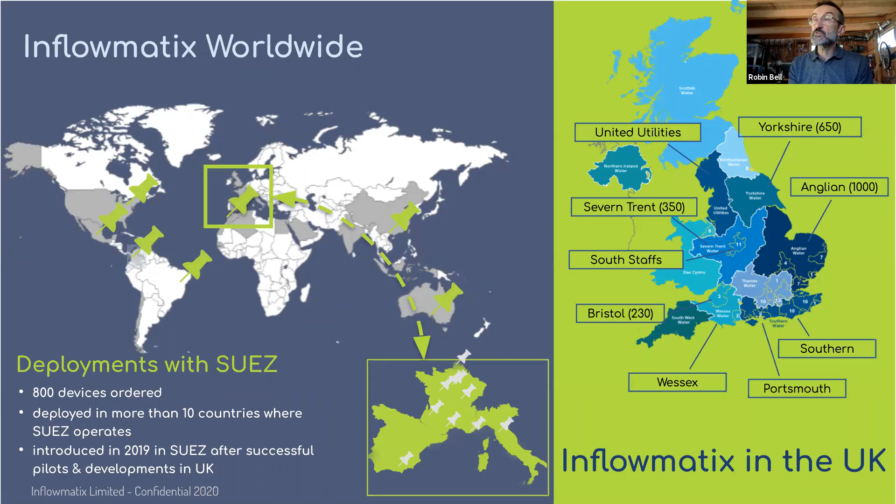So very quickly, our products and services. Today, I'll talk mostly about InflowSys Edge and the case studies that have come from that. We also have a product which is Arboricity, which is built on hydraulic modeling, uses the high frequency pressure insights, and is actually a data agnostic platform, but we don't have time today to talk too much about that.

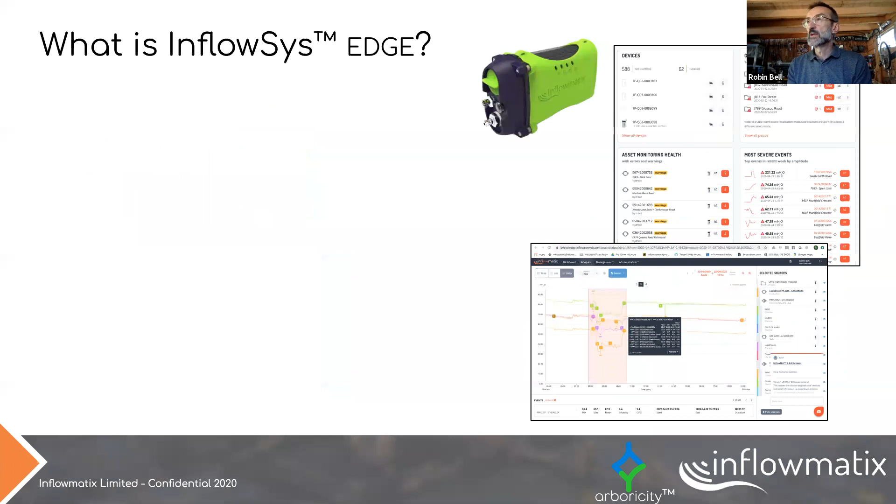Calm Network is the association with CPIS, and again, Pierre will cover that. CPIS have a minority interest in Inflowmatix. We also work with Cla-Val on advanced pressure management techniques, and I have one case study in relation to that. We also have a relationship with Black & Veatch, and we have a Serene product, which is about DMA, healthy DMAs.

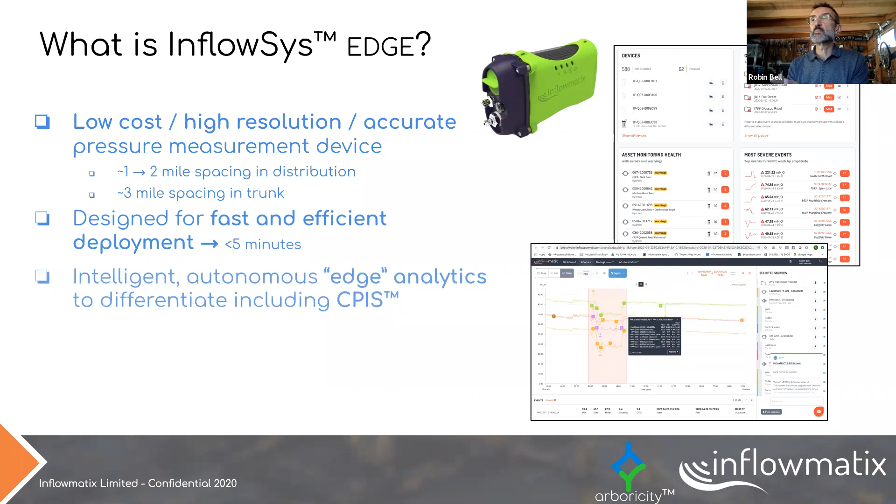So what is InflowSys Edge? It's a low-cost, high-resolution, accurate pressure measurement device in the first instance. We give some indication there in relation to how those might be deployed. It's not hard and fast, but it gives some indication of our approaches. It's very fast and efficient to deploy, and it has the ability to do computing at the edge of the network, and that's a fundamental capability for us.

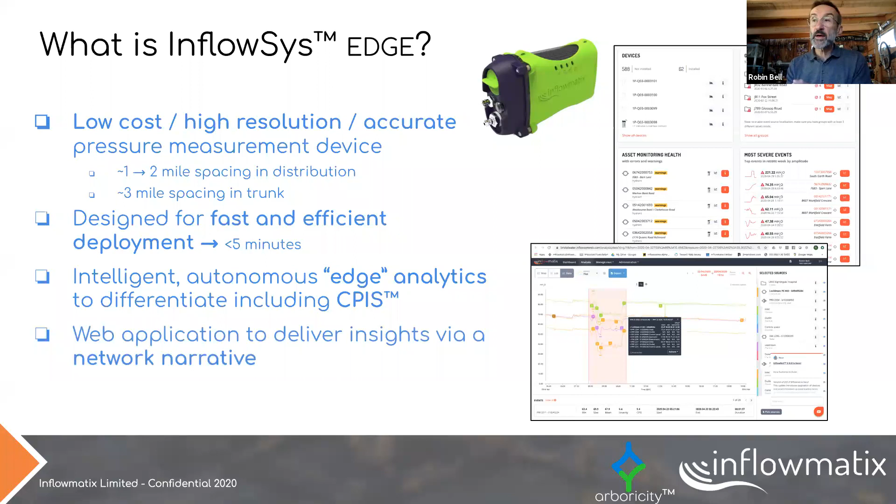And of course, we have a web application to deliver insights by what we call a network narrative. As you might expect, that web platform has event alert reporting, management. We also do event source localization. And the most important thing for us is we can integrate into corporate systems. So just a very quick summary there. Again, not time to talk in any detail. We also have secure communications. It was a very important part of our configuration, that it must be a secure platform.

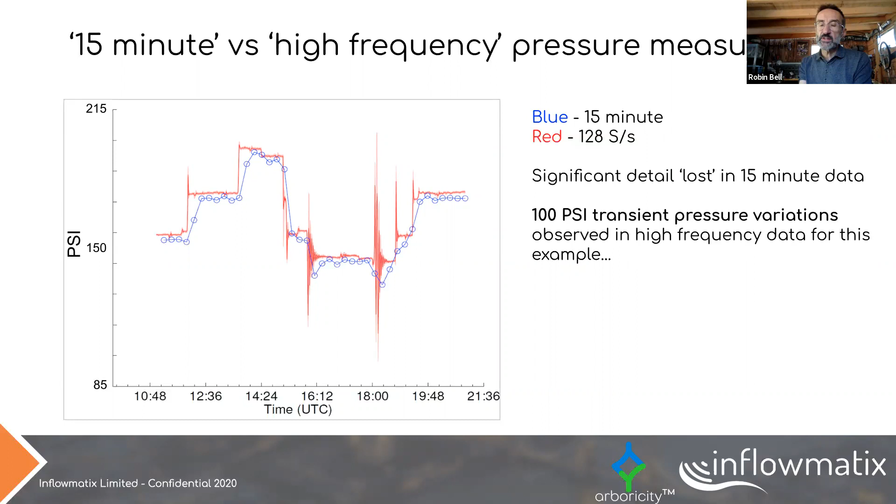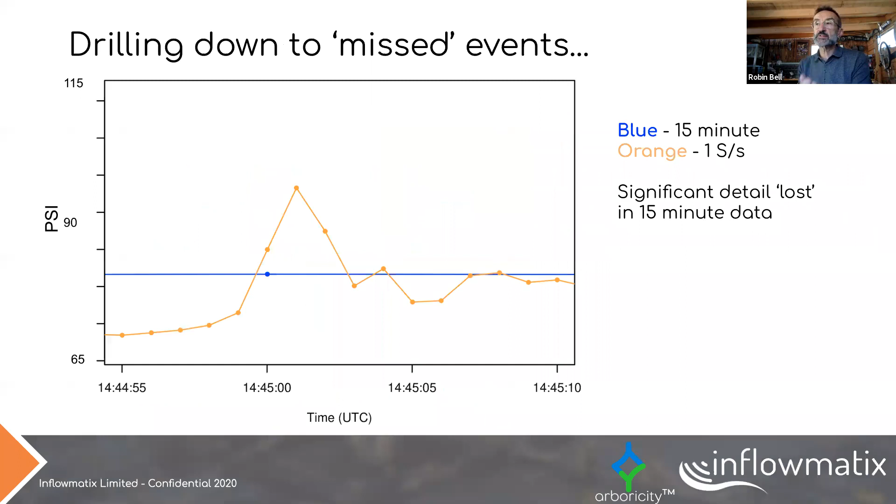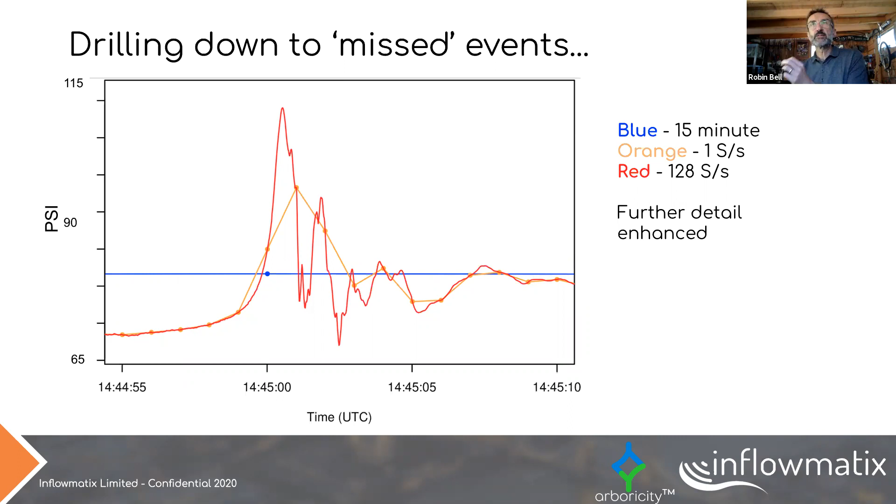1 second is an improvement, but it still doesn't capture the full resolution of the transient response. Going to 128 samples per second reconstructs the waveform. It's important—in communications theory, Nyquist theory means you need to oversample. The same process is true in the water network for capturing these detail effects. So it's very important to have the right sampling frequency, and we have chosen 128 samples per second to be the optimum for what we're trying to achieve.

So I'll introduce a metric called cumulative pressure induced stress. This was developed in conjunction with Imperial College, following a significant period of research. On our board we have Dr. Ivan Stoianov, who is a reader at Imperial College, and he has helped drive towards some very clear and fundamental solutions, which include this particular metric.

So what we're capturing here is a cumulative effect of dominant cycles that are just not seen in the 15-minute data. We talk about pressure variability—we don't just talk about transients. Transients imply they're sort of single events, but cumulative pressure variations can be continuous effects.

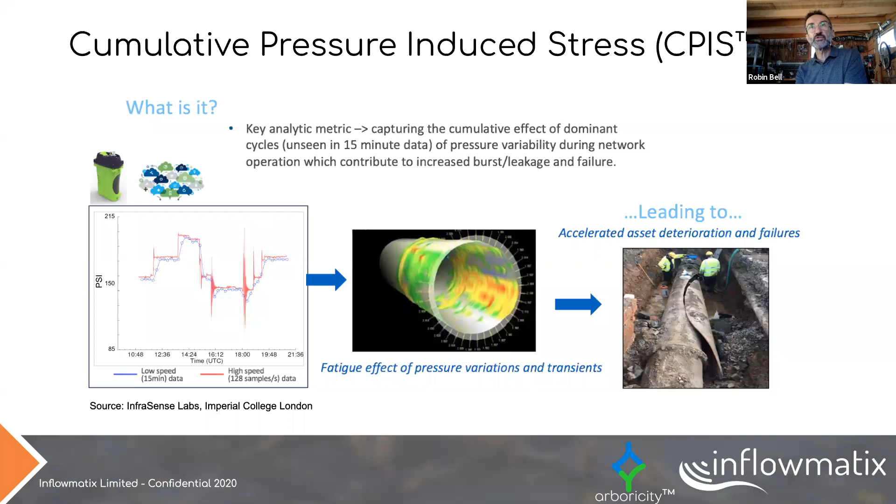Traditionally, age, material, climate, and soil types fed into burst correlations. I'm delighted we have Alan Lambert on the session today, because he clearly brought the industry's attention towards the impact of pressure, mean and maximum pressure, on burst correlations.

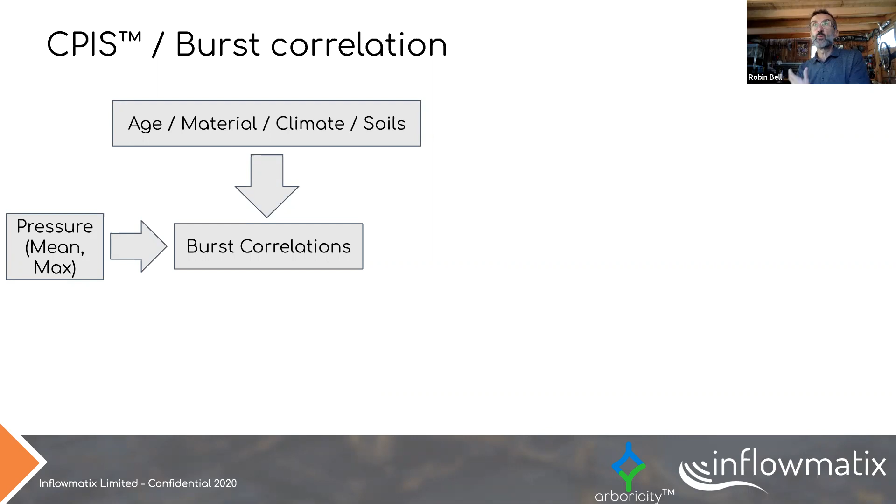What we believe we're bringing now in terms of the high frequency dynamics is adding to those correlations with more microscopic information about networks. We did a study in collaboration with Imperial College, but also with Severn Trent Water, of over 700 lift and shift installations of devices capable of measuring that high frequency dynamic variation, using our products.

Just to understand, these were deployed for maybe 1 or 2 weeks in a particular location, and then moved on to another location, and we built up this database of over 700 deployments.

Again, here I'm plotting PSI against burst rate per 100 miles per year. On the right-hand side, you can see what I'm showing there as greater than 20,000 PSI. Now, what that means is, in a 24-hour period, there have been excursions up and down in terms of pressure which accumulate to 20,000 PSI. Those are very significant, very large magnitude variations, but some of those are very small variations which accumulate to get that score.

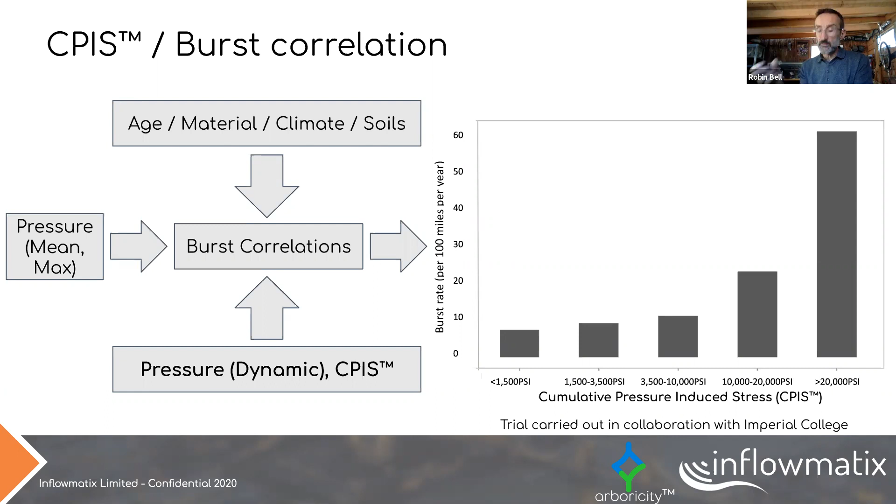We were able to correlate those numbers to burst records over a 10-year plus period. So we saw, even though the pressure data was effectively new data, this related to burst records over a significant previous period—there was still a correlation, which is significant in itself, and this confirmed the damage that high frequency pressure variations can do to networks.

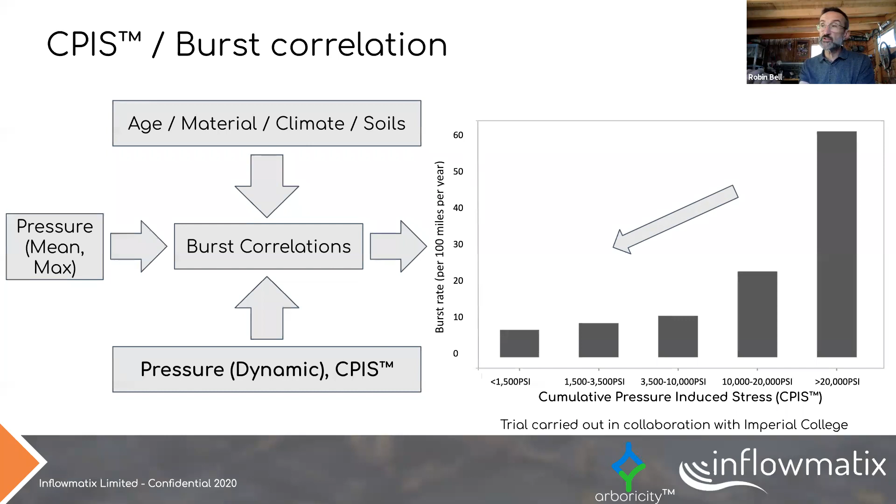And of course, reducing that—and it's possible to reduce by orders of magnitude—has a similar effect on the burst rates. So I'm sure many of you here have heard of transients.

We have a quick demonstration from me now. Then Pierre Bonnadet will follow up with a very significant real-world installation which shows these pressure variations.

So I'll play it, and I'll just say that you'll hear a big bang initially—what's happening here is a valve is being opened in a test grid, then you'll see cavitation effects. If you watch the pipe carefully, it has a glass cover, so you see the air compressing, expanding and compressing. Then if you listen hard, a little bit later you'll hear a second bang, which is the propagation of that surge effect through the network. I'll just go back and, okay.

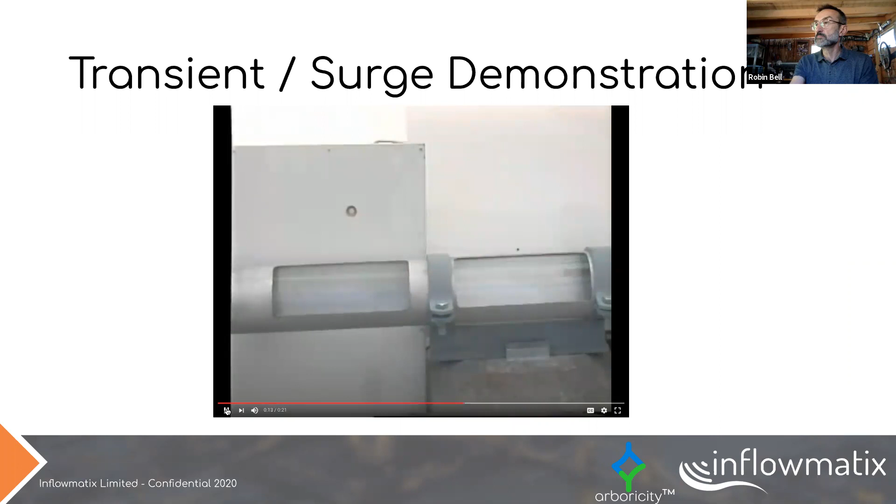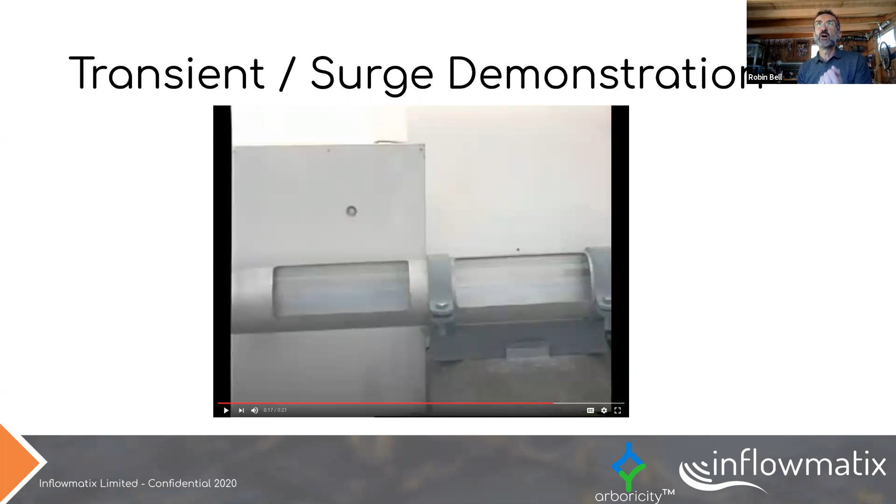So you can see a very physical manifestation of surge effects due to, in this case, closing the valve.

I'll move on to some use cases where we've worked with, in this case, primarily UK utilities, and then Pierre will go on to some of the worldwide cases.

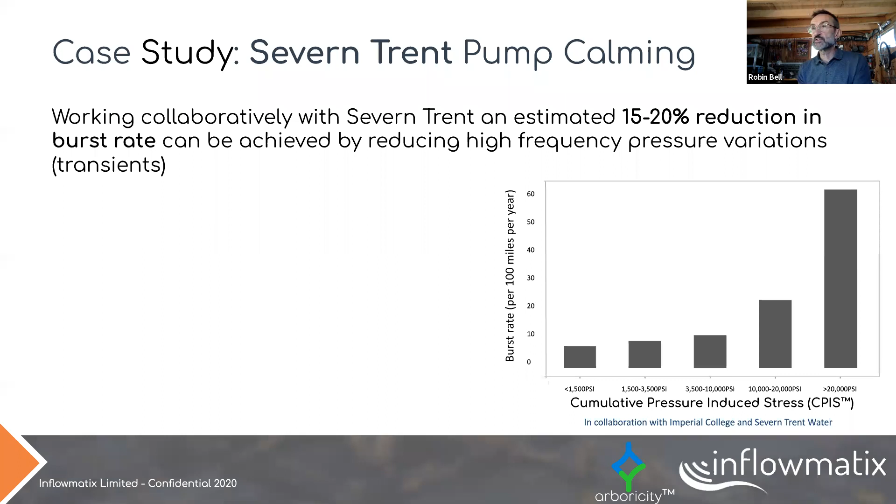I mentioned that we did this study with Severn Trent, and this was presented to the board of Severn Trent Water. We did some analytical studies to determine the potential, across the full network, to reduce those dynamic variations and achieve at least a 15 to 20% reduction in burst rate, which was relatively conservative in its nature. Those benefits were calculated by Severn Trent and presented to their board.

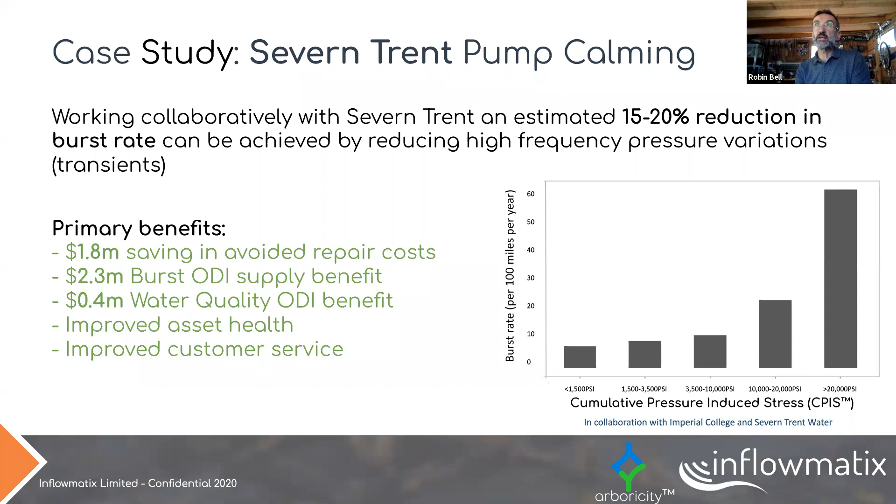We know that this improves asset health. As part of this trial with Severn Trent, we found that in a zone which had significant surge effects, there were very high PRV maintenance rates compared to a gravity-fed zone nearby. And of course, it improves customer service if the supply interruptions are reduced.

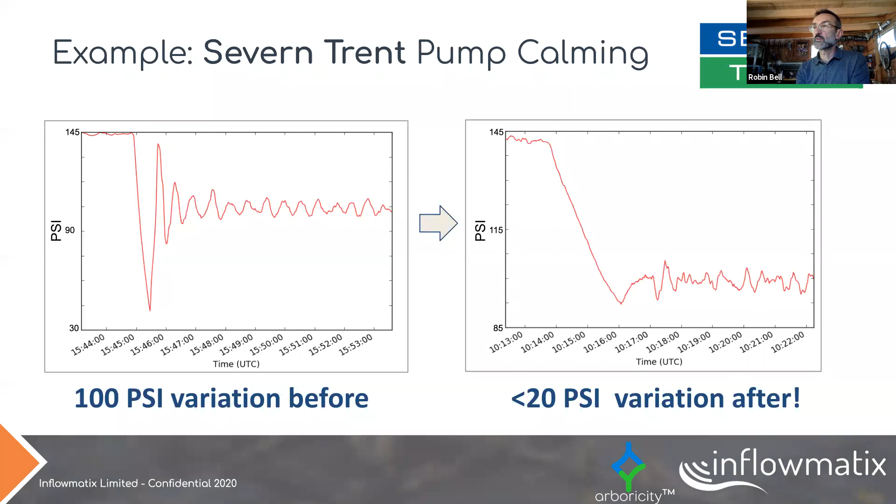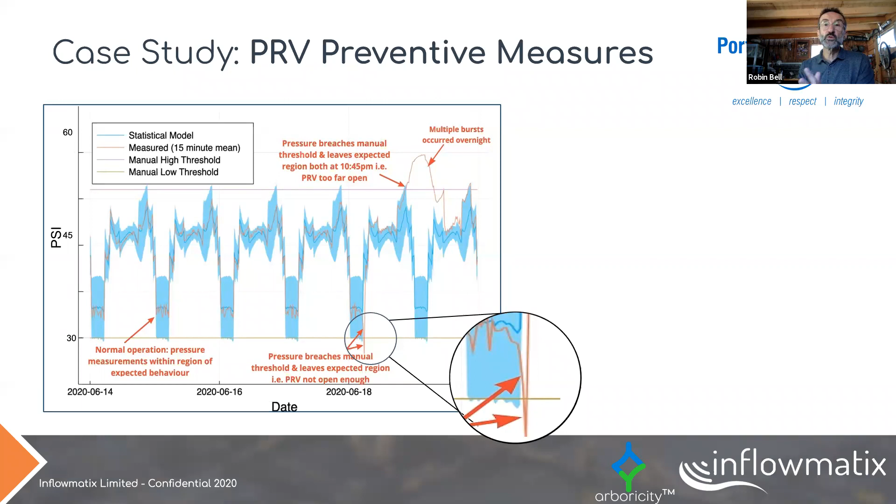Very interesting talking to Portsmouth Water and a gentleman called Jamie Jones, who is responsible for ensuring these PRVs are operated. Having that insight would certainly allow them to make interventions to the network before issues occur.

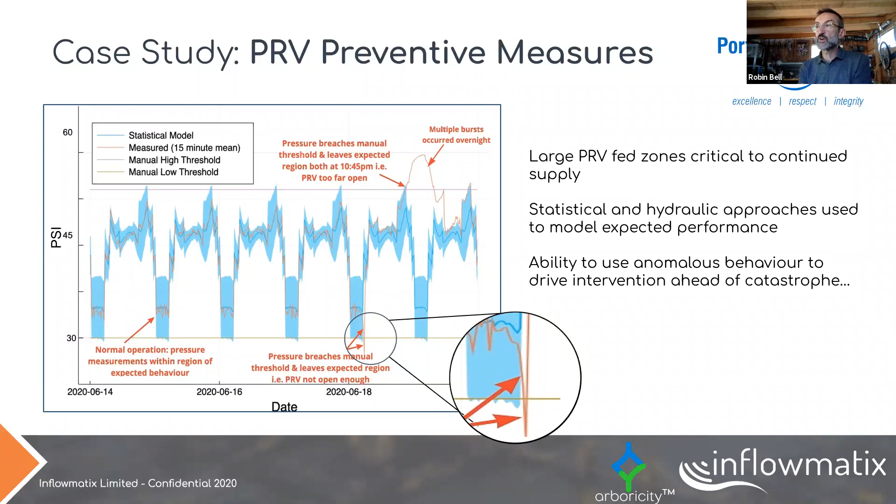So large PRV zones are critical to continued supply. Statistical and hydraulic approaches were used to model this performance, and this anomalous behavior can be used to drive intervention ahead of catastrophe. So I now move on to a case study with Yorkshire Water, where they had very, very high cumulative pressure induced stress, CPIS.

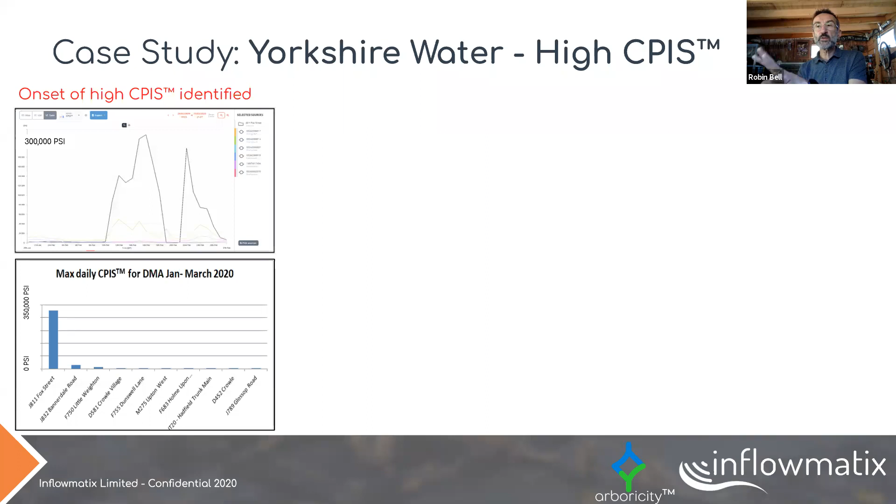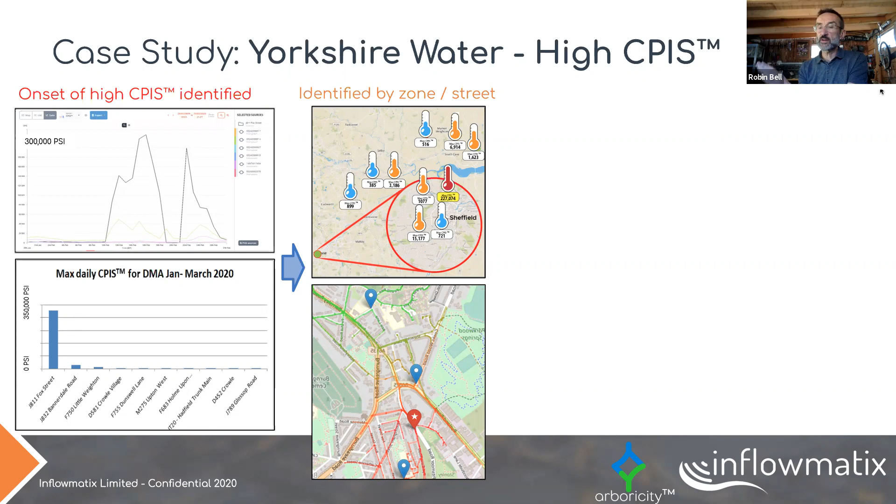So 300,000 PSI appeared - you can see a trace on the top left there. We were then able to dissect that down into a particular zone, and that generated an identification by zone and by street. Then they were able to address the PRV hammering and hunting and resolve that.

And although that made a significant impact in the reduction, and they continue to reduce the CPIS in that area, the PRV actually remains oversized, and that magnifying glass there shows there are still significant fluctuations at a significant rate.

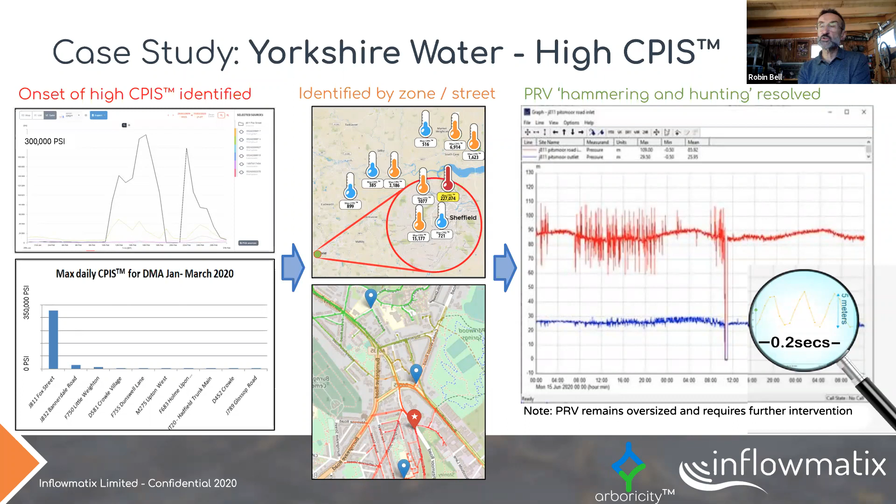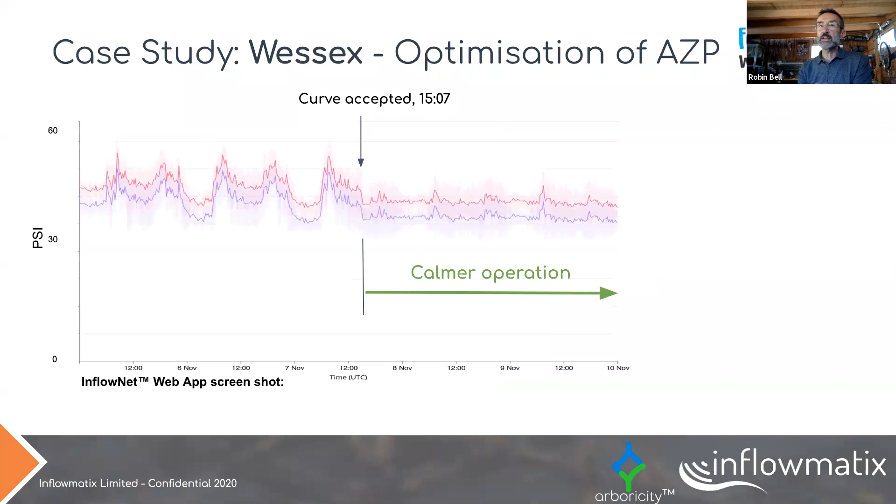Very quick case study here in relation to Wessex, where we were able to calm the network by implementing a calm solution in conjunction with Cla-Val, where we have several devices deployed in a DMA which work together - not just at critical points, but understanding the hydraulics within the network, feeding that back to the link-to-valve solution of Cla-Val.

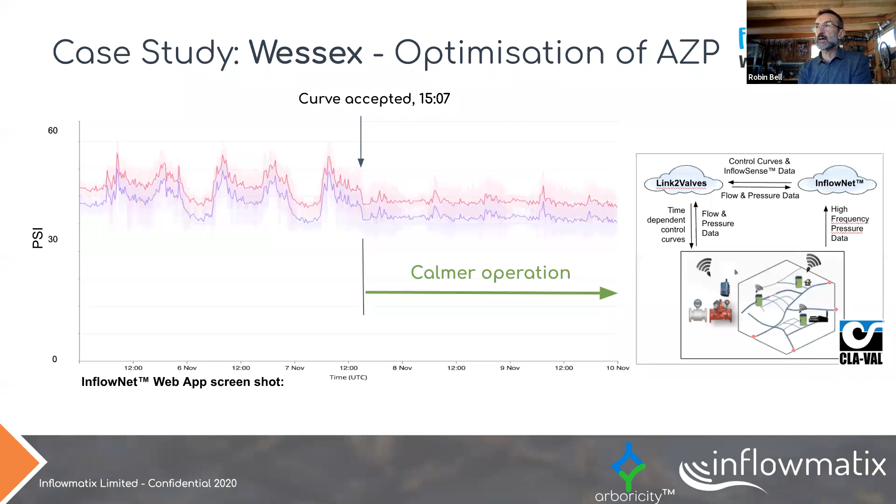So I've covered very, very quickly, in the time we have available, a number of case studies. Just one more slide, then I'll hand over to Pierre. Dynamic pressure variations clearly, indisputably damage critical assets. We can understand these effects using cumulative pressure induced stress, our CPIS metric, and it's the first step towards resolution. It's just one of the tools we have, but I think it's a very significant one to share with this audience. We're going to move on to talk about calm network solutions, working with Suez and Cla-Val, so Pierre has a number of those examples.

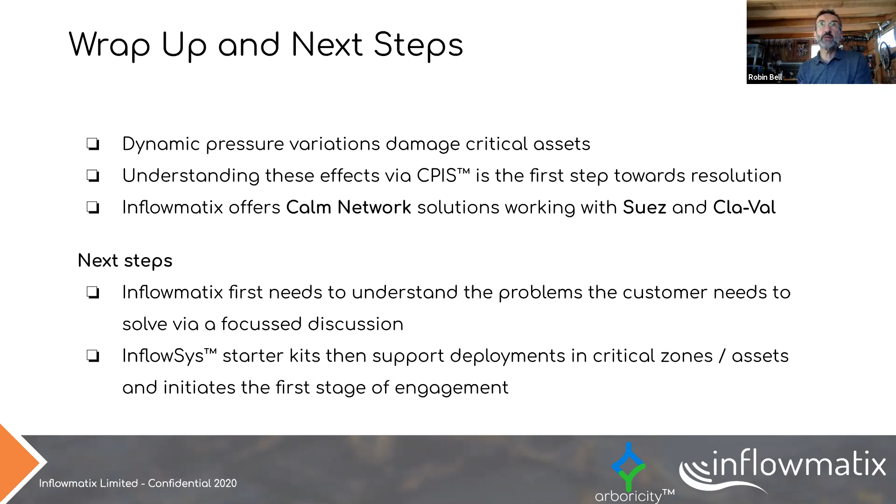We have an approach called InflowSys Starter Kits to support deployments in critical zones and assets and start that first stage of engagement. And as you can see in the UK and also worldwide, we've scaled that engagement quite significantly over the last few years.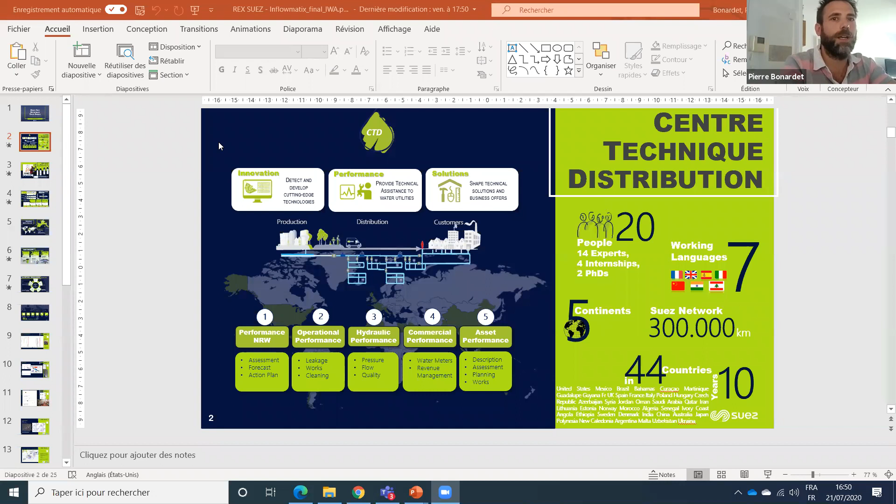Thank you, Robin. As you may hear with my accent, I'm not British, but I hope you will understand what I'm saying. I will present our journey with Inflowmatix to the calm network with Suez, and I will develop the calm network approach that we have developed within Suez.

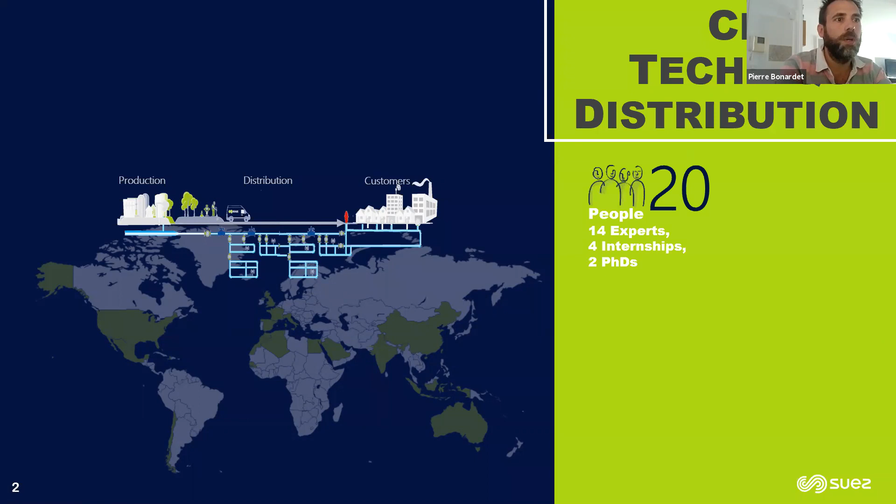First of all, let me introduce myself. I'm Pierre Bonardet, a member of a technical team, the Centre Technique Distribution, which is a specialist group of 20 people. We provide expertise to our business units around the world. This group was created by David Duccini, I guess some of you are familiar with his name.

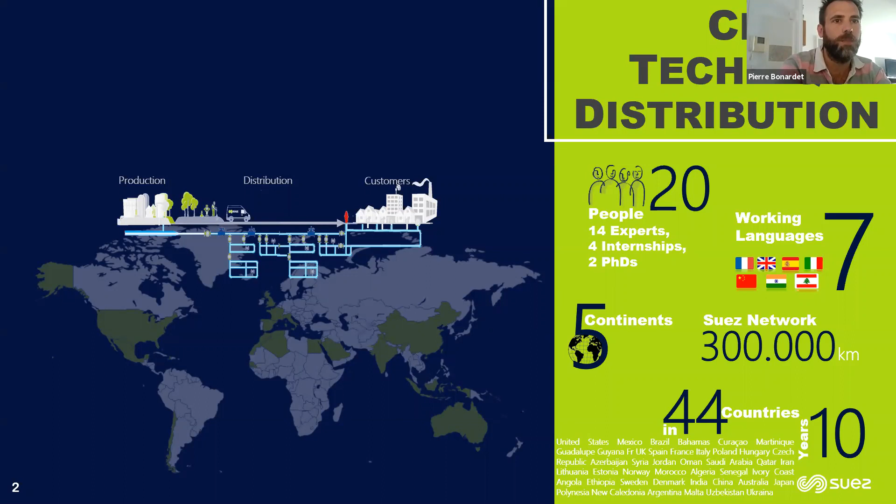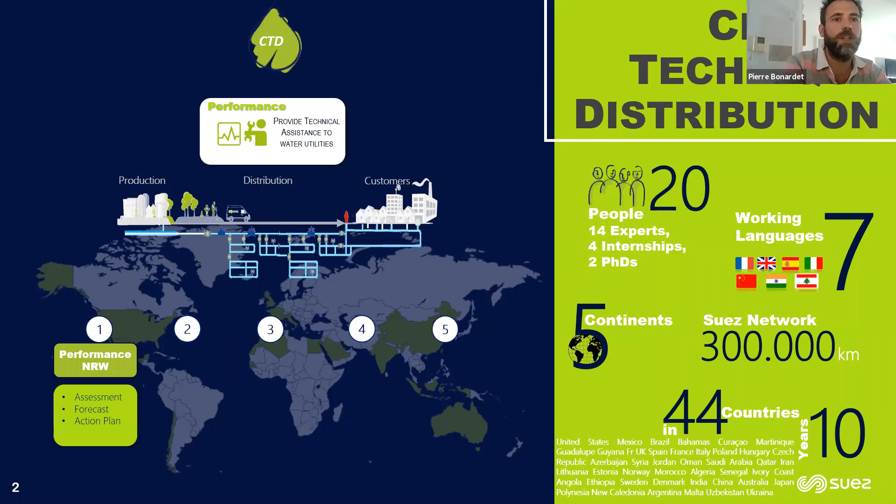In Suez we have many water utilities, and we want to provide them support and improve their performance. We manage very small utilities to very big water utilities across the world. The idea of our group is to gather feedback, gather experience, and develop innovation in the field of water networks. So you have the 5 topics on which we are working.

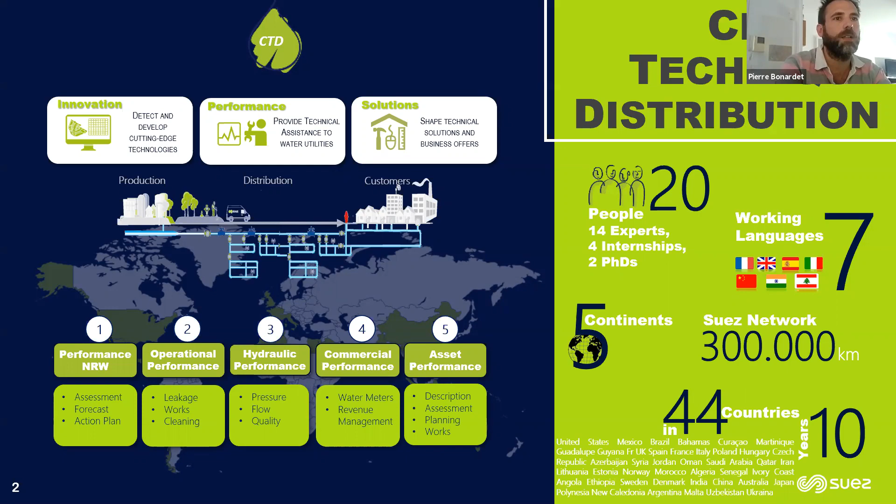Today we mainly focus on hydraulic performance and asset performance. In order to deliver performance, we need innovation, and that's where Inflowmatix comes in. But we also need to embed this innovation into a solution, into something we can deliver to our clients, whether internal clients of Suez or external clients. And that's why we have developed the calm network approach.

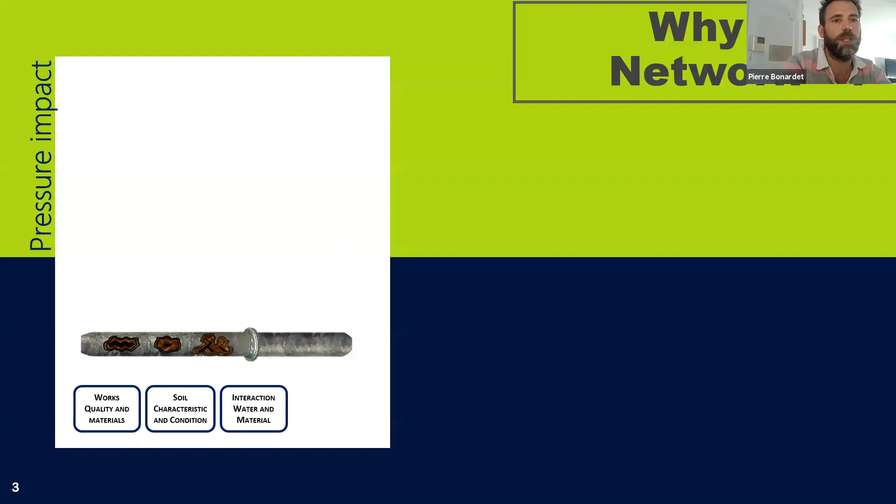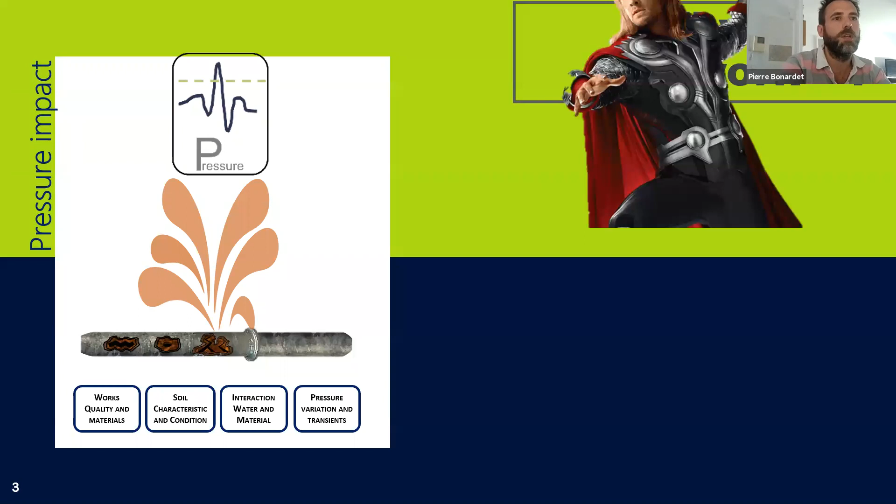Why calm network? Because pressure management is key to understand for pipe degradation. It is a source of degradation of pipe together with soil condition, water quality, and so on. But it's also a source of failure, particularly if you have a transient and very big pressure variation. So what we want to avoid is this water hammer in the network that can occur with many sources of transient. In order to know where the transient comes from, we need this high frequency pressure monitoring device.

So what is our story with Inflowmatix? As a Suez specialist group, what we usually do is techno tests. So we reviewed this technology, starting watching this technology 3 or 4 years ago. There are many actors in this field, so we reviewed them, and then we became really interested to work with Inflowmatix because it's more than pressure management.

It's also, they come with the CPSI as an asset management indicator. They come with the Imperial College approach, which is a more scientific approach of pressure management. So we were really interested to work with them. As Robin said, we partnered with them, but not only did we invest in the company, it's also a partnership in the development of the product.

So we are currently developing algorithms to improve all the data analytics, because if you are managing 1 second data, or 128 data per second for many pressure devices, it's a huge amount of data that you need to collect and analyze. So we are working on data analytics, and now we are starting the deployment in our contracts, starting massive deployment to boost the performance and pressure management of our contracts.

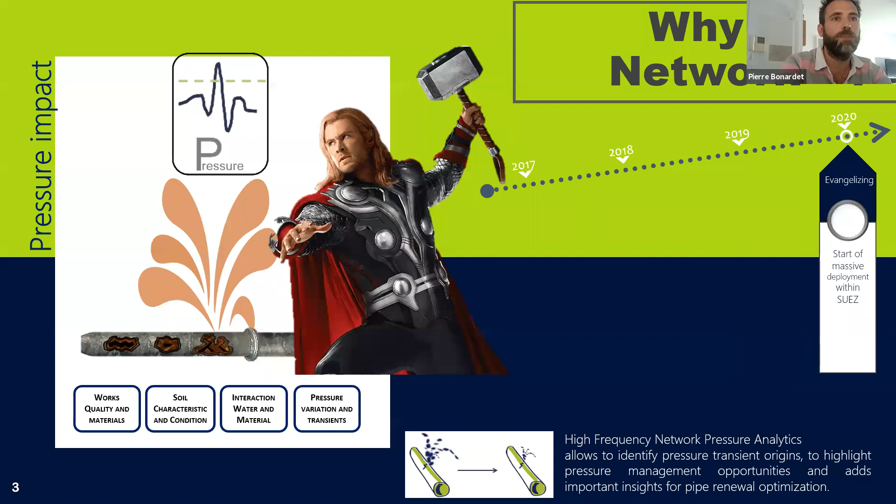What is also interesting is that in the framework of pressure management, we have developed different solutions, different approaches. First, we are convinced that if we want to tackle the problem of real losses, we should not only work on leak detection, but also work on asset management and pressure management. Because the idea is clearly to reduce the number of new leaks. In order to do so, either we renew the pipe or we decrease the pressure and manage the pressure on the network better.

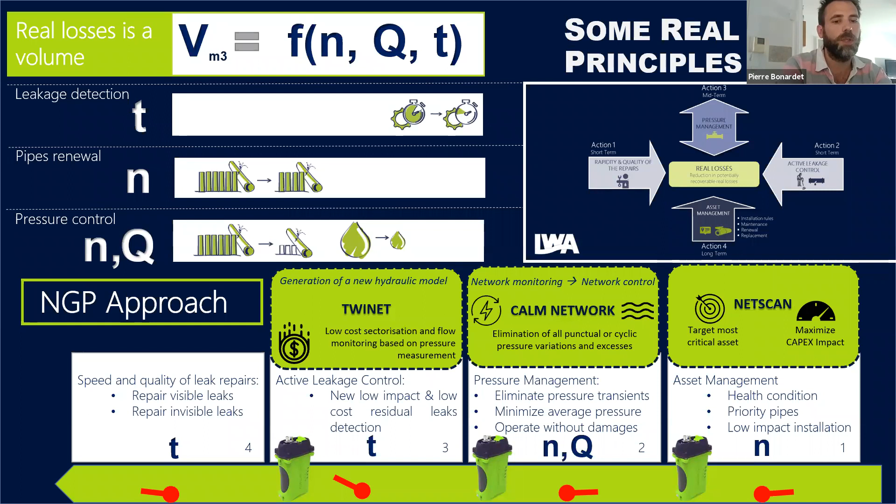So we have developed solutions to better know the risk of the pipe with NetScan, with all the asset management tools that we have. We have developed the calm network approach to better manage the pressure on the pipe. And we are also developing a new approach of hydraulic models, what we call digital twin, in order to use operational hydraulic models to gain information on the network and detect some events. For all these purposes, we are using Inflowmatix because it's a very useful and multi-purpose tool.

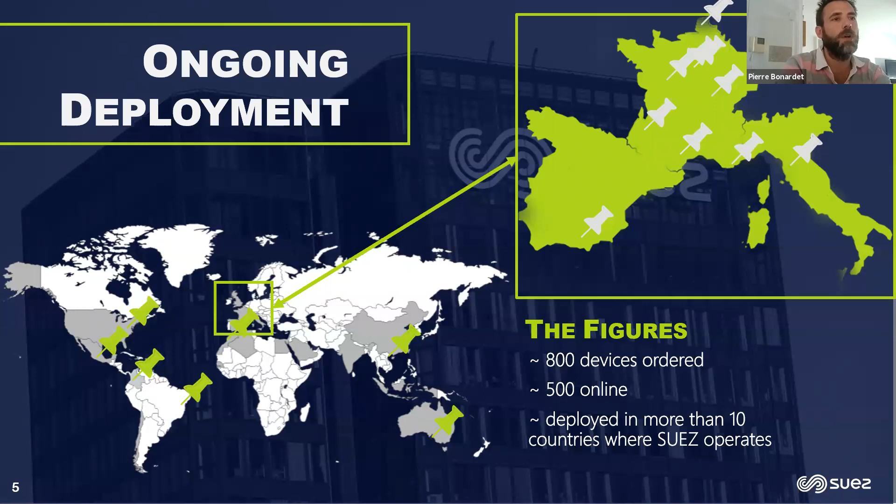In terms of deployment, we started to deploy it in Suez, mainly in France, and now we are deploying it in more than 10 countries. We have started also in Australia, in Morocco, in South America, in America, Mexico, Spain, Italy, and in many contracts that we have in France. So these figures are growing. We have 800 device orders so far, but the idea is to grow and to do assessment on the most critical contract using this device.

So Calm Network, how does it work? We have designed a 3-stage process. The idea first is to have a better understanding on the pressure, on the dynamic of a water network and on the pressure variation on the water network. So we do what we call the network narrative. The idea is that we deploy this device on the network. And what is very useful is we can have a lift and shift approach. So we can do punctual diagnosis, or we can diagnose a DMA or an area or a full city. And it's very easy to deploy. Once we do that, we gain knowledge on the network and we identify some mitigation action.

And then comes phase 2, where we try to eliminate transients, but also to work on pressure management and reducing pressure, reducing average zone pressure, and also better control of pressure during day and night is a part of the design job that we do in phase 2. So it's not only about transient management, it's a holistic approach on pressure management, which includes reduction of pressure, control of pressure, and transient management. And for that phase, we are also collaborating with valve providers such as Cla-Val in order to have a better way to control the pressure on the network. And the combination of both Cla-Val and Inflowmatix helps us to monitor and control the network.

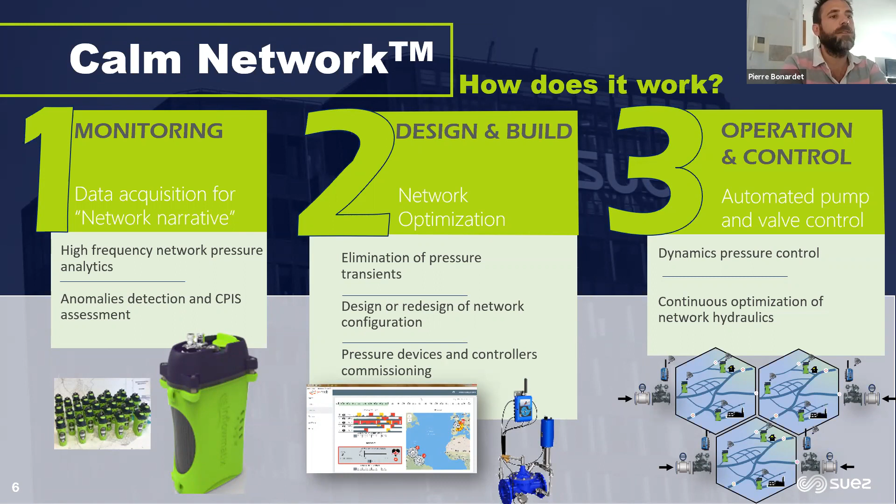And in order to do that, we go to phase 3, which is a more permanent monitoring, and where we use our tool for network monitoring. We have a tool called Aquadvanced. And the idea is not only to look at pressure data, but also to combine this data with flow measurements, with smart metering, with GIS data, and have an online monitoring and control system of the network. So that is our approach. And the idea is that Inflowmatix is fit for purpose for all these objectives.

First of all, it enables punctual diagnosis of equipment. And in that case, we will do diagnosis of pump stations. We will diagnose the surge protection. We will see if all the PRV set points are set, if all the PRVs are working. We also must emphasize the impact of our operation on transients. So transient is not only a problem of pump start and stop, it's also a problem of valve operation by our operators. So this equipment enables us also to record some behavior and to train people to better do valve operation. So hydrant testing, for instance, or valve shut off and leak repair. The idea is to do a smooth valve operation and to monitor this behavior and to train people on that topic.

Then we can do a more massive deployment with a network narrative, where we will deploy dozens of devices for a network, and we will record data and analyze it. We do pressure control and design, and we will do the permanent monitoring, and also use this data for other purposes, such as asset management or hydraulic models.

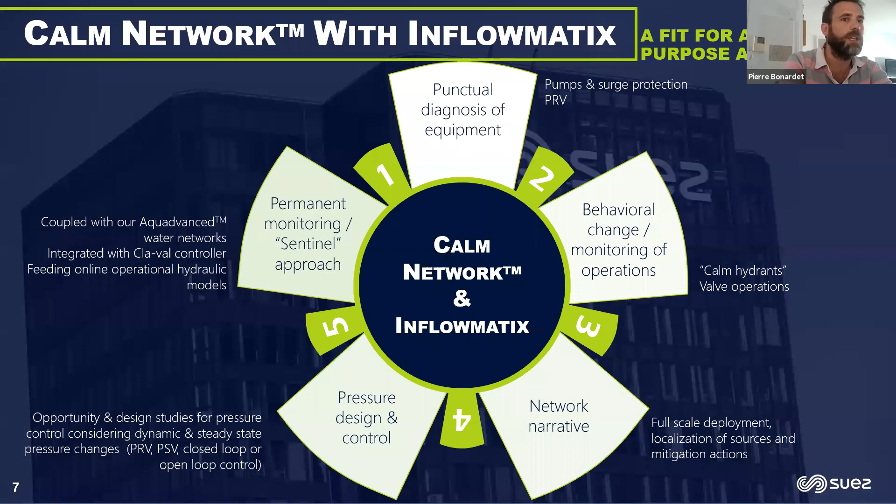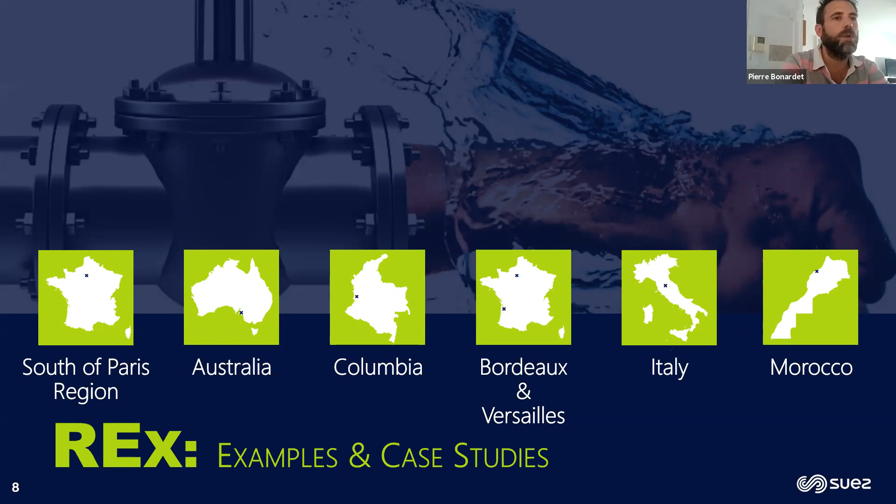Some REX, so REX is a French name, but it's retour d'expérience, so feedback, operational feedback on some case studies. This one is from a case study about behavioral change. You know, when you do hydrant testing, you can generate a lot of transients on the network. And this is the kind of curves that you can generate when you do hydrant testing, fully opening a hydrant on the network and generating more than 4 or 5 bar of pressure variation. So the idea is to compare this situation to a better operation where you can maneuver valves smoothly and then generate slower perturbation to the network. Because hydrant testing is a very common operation on the network, we are generating dozens of transients every day in our networks doing testing.

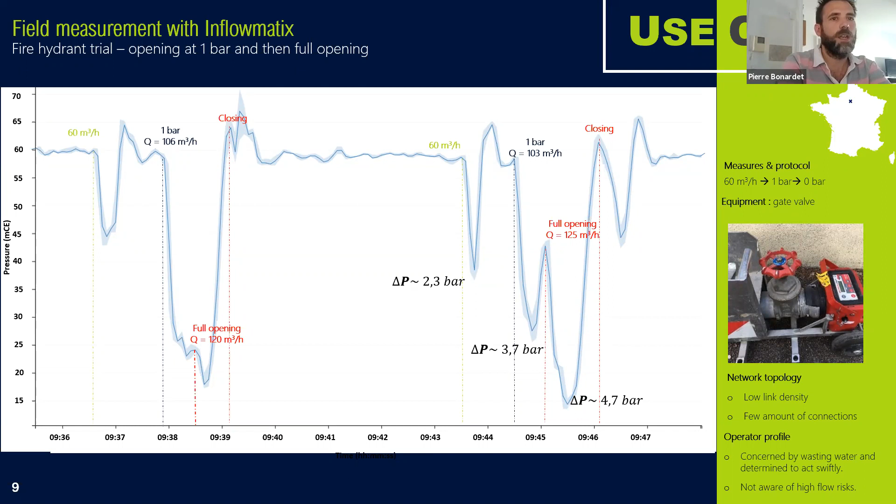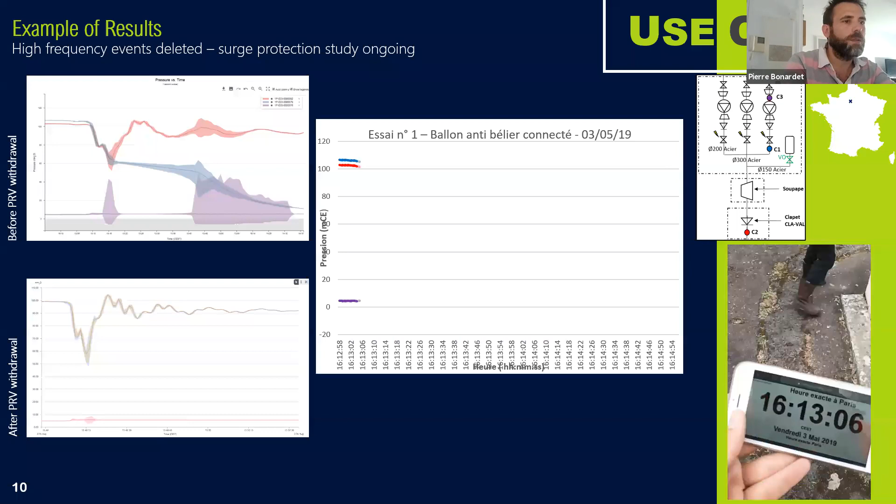Hear the noise, and you see the curve of pressure variation that corresponds to the first wave of pressure transient that has generated an impact on the pumping station. But we also have a second wave coming. The second wave is not only about COVID, it's also about pressure transient.

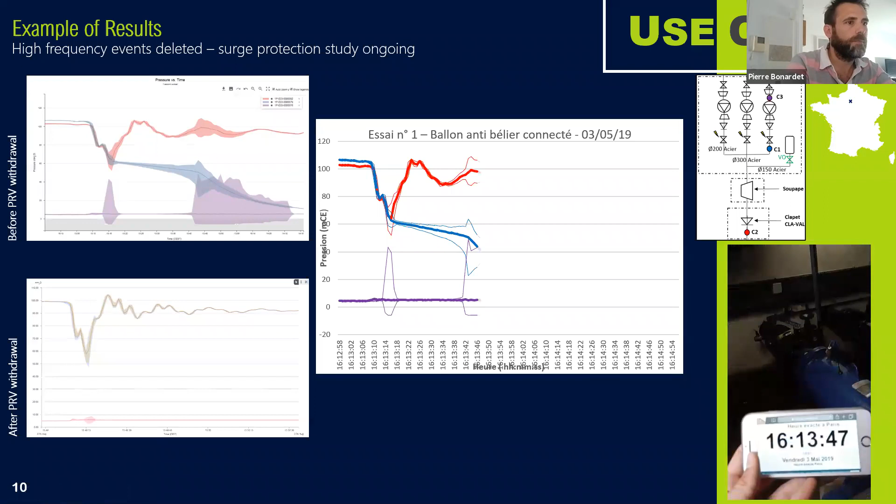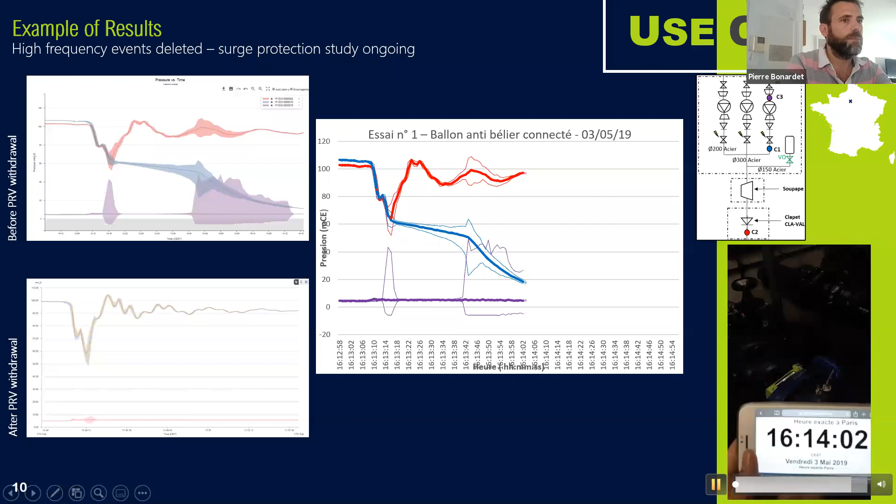You can imagine the damage that it can do on the network, because this pressure wave is propagating and it can really damage the network. Another example that we have is a PSV. You have this wonderful curve, I think a very nice transient curve at 2 points of the network on a critical pipe. That's why the pressure wave is propagating very well, because it is a critical transport main with no connection.

And there is a pressure wave that starts at a PSV, a pressure sustaining valve, and that rebounds on a check valve a few kilometers away, and it comes back, and you see this curve. And we were able, thanks to informatics, to diagnose this problem, to identify the cause, and to simply remove it by better maintenance of the valve and by changing the speed of opening and closing of the valve. So in that case, it's a simple screwdriver operation that can fix the problem,

or at least 70% of the problem, because in terms of pressure, we go from 10 bar to 7 bar. And in terms of CPIS, for this example the CPIS was 700, and the new CPIS of the event after this operation is 100. So you can imagine that the impact is less important now than it was before, thanks to this simple maintenance of our PSV.

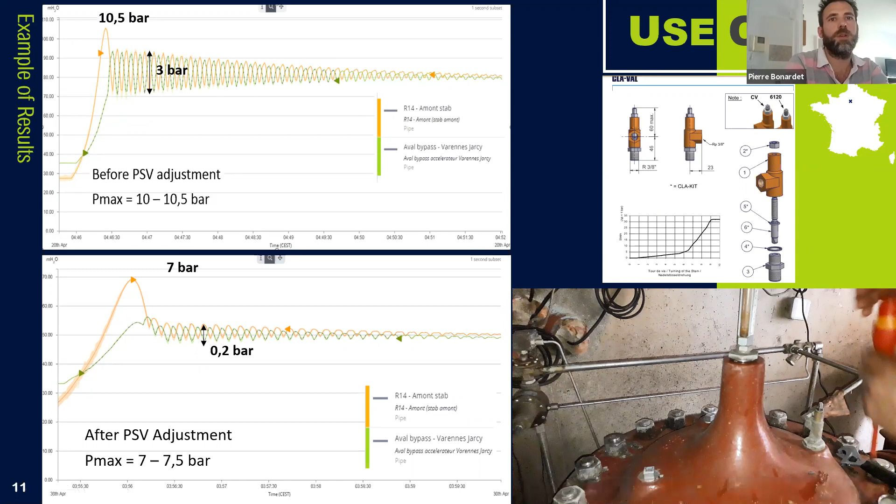Another example, and here the idea is that we don't do only simple deployment, we do massive deployment on some contracts. Here in Versailles, we manage 850 kilometers of networks, and we have 45 devices installed. To maximize the interest of informatics, we do a deployment plan where we look at different criteria to install the device on the network: for instance, the heat map of leaks, the age of the networks and the kind of material, the big consumers, because big consumers can generate transients, and also the potential sources of transient: pumps, PRV, motorized valves, and so on.

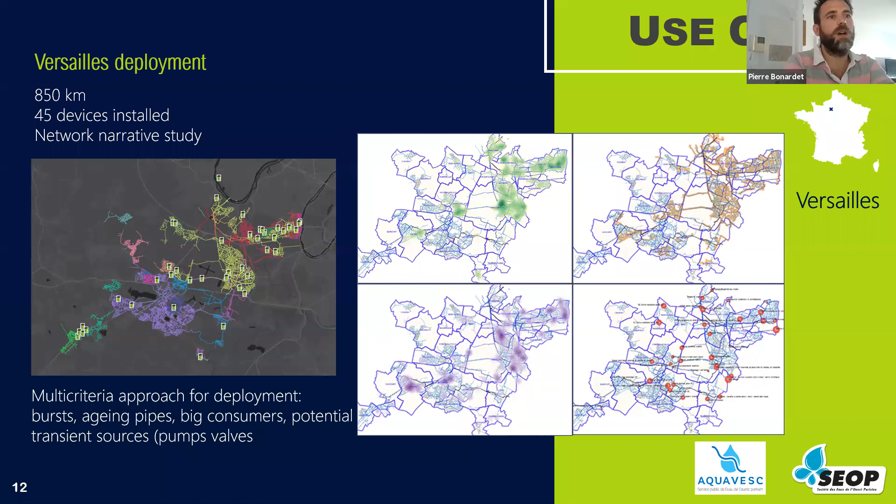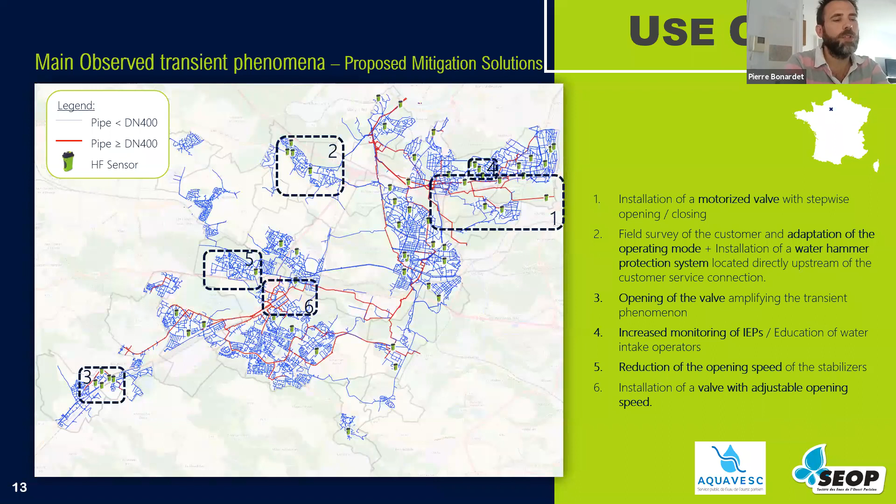We do this deployment plan, and then we do an assessment. We do a full diagnosis of the system, identify some phenomena and root causes, and then we propose mitigation actions. I will focus on some actions. One really interesting thing is that sometimes this device enables us to understand how the network behaves. In this particular case, we had a very severe event, and we suspected it was due to a reflection on a closed valve. But there was no closed valve on the GIS, simply because the GIS hadn't been updated after the recent work done in the area.

And in fact, we found that there was effectively a closed valve on a big main. Once we reopened this valve, we did not suppress the source of the transient, but we suppressed the source of amplification of the transient. And you see the result in terms of CPIS, which is a good indicator that we have calmed the network. So this is a very good example of how network design can amplify transient phenomena. That's why in Suez we try to promote more open networks, with wider DMAs and fewer closed valves, so that we have better propagation and dissipation of energy and no such events.

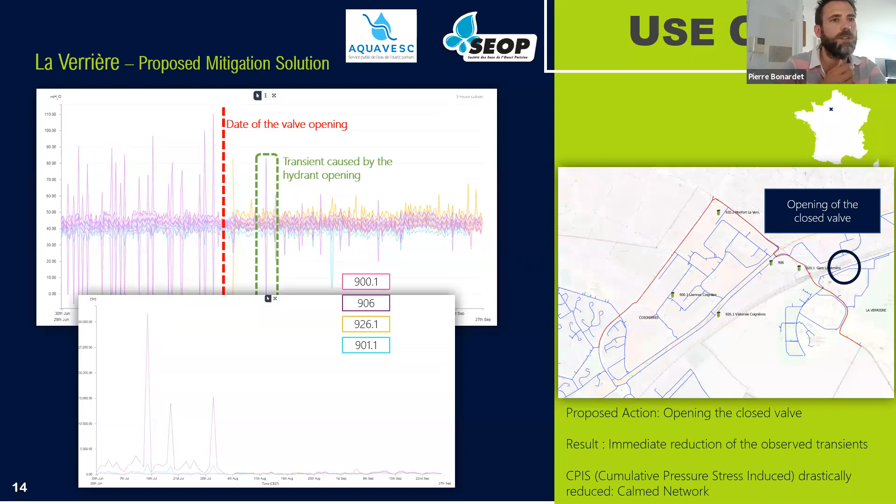Another, and I think this is my last example, is a motorized valve. You see that 4 devices see a phenomenon, so there is a propagation of the phenomenon in the distribution network. It's due to the filling of a reservoir, a tank, by a valve. So we installed a motorized valve, and then we set up the speed of closing of the valve, so that we reduce the phenomenon and suppress the transient wave generated by the closing of the valve.

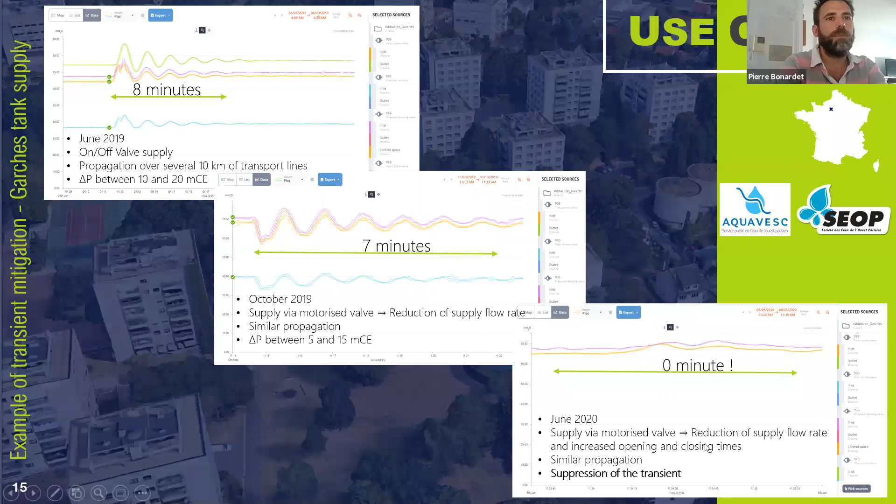And my last example, because I spoke about France, but we have examples in other places. I like this one because it's in Tuscany and the food is really good, but also because it's a very interesting contract for Suez, which is Nuove Acque. Nuove Acque is a public entity and Suez is a partner of the municipality, and we are managing the network for 30 years.

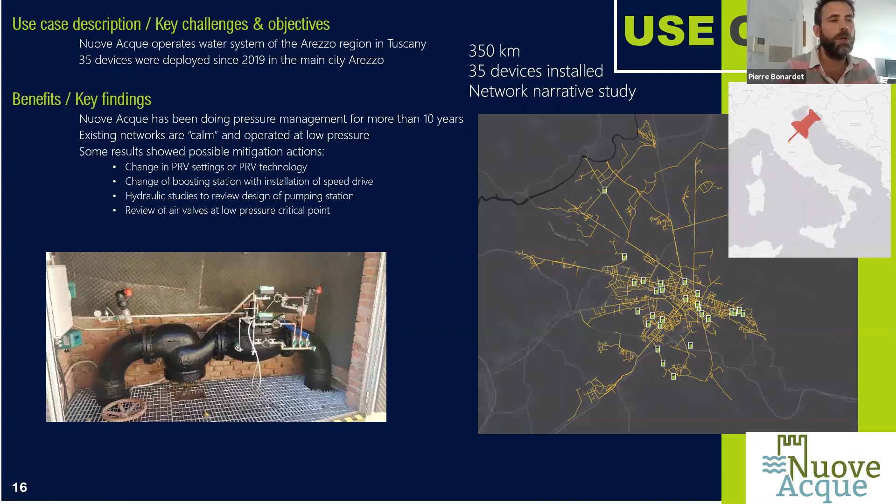But you see this valve is the valve from Cla-Val. I think it can be one of the first hydraulic valves installed in Italy or in this region, because it's a 60-year-old valve which is operating quite well. And Nuove Acque has installed different pilots to monitor and control pressure. And now we are installing Inflowmatix to better understand the pressure behavior, and we will work with Cla-Val to install a more modern controller. So this is an ongoing story of improvement of existing pressure control. So this is an interesting example as well.

And you see in some places also, in Italy, we did this kind of network study. And in some area, we saw the impact of changing a PRV. So here we change the PRV, and you see the impact on CPIS on 4 different locations. So we have calmed the network on this location, but we still have a high CPIS in one area. And when we look at the pressure data, it is because we have a big consumer.

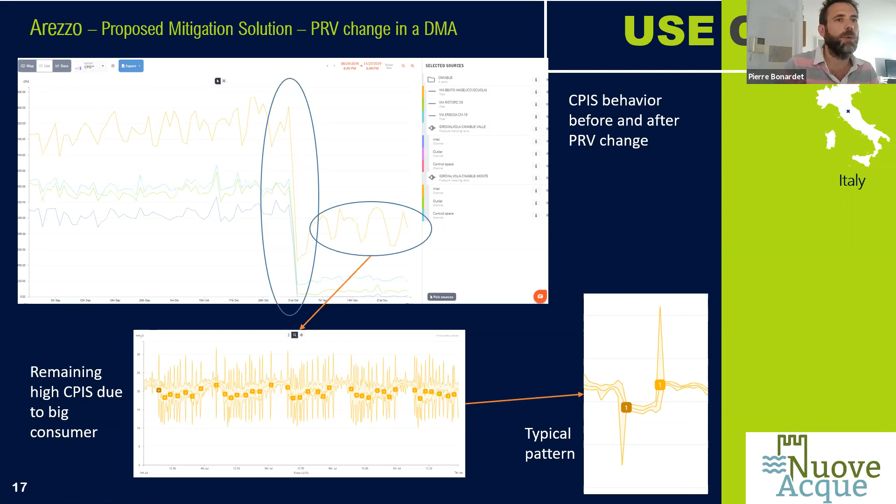So we have a domestic consumption that generates this kind of characteristic curve, and that's why when we do pressure transient management, it's a holistic approach. It's not only about working with PRV and pumps, but it's also understanding the way the customers take water and the way our operators are maneuvering the valves. So it's clearly a holistic approach.

I will go quickly on that, but we have examples also of the impact of COVID and lockdown on the calmness of the network. And we can see that in some areas we have a calm network because we have no more activity, and we are able to monitor it with Inflowmatix. And we have ongoing developments. I will go quickly on that, and I finish in 2 minutes.

As I said, it's not only useful for pressure management, but it's also useful to monitor the pressure for asset management. Robin demonstrated the link between CPIS and the burst rate, and we did a similar study also. And the idea is we need to monitor our critical assets. And when we do an asset management strategy, it's not only renewing the asset, it's also about knowing where our critical assets are and putting in place a strategy to improve the life expectancy of these assets and to protect these assets. And with a calm network approach, we want to calm the network and especially the most critical assets.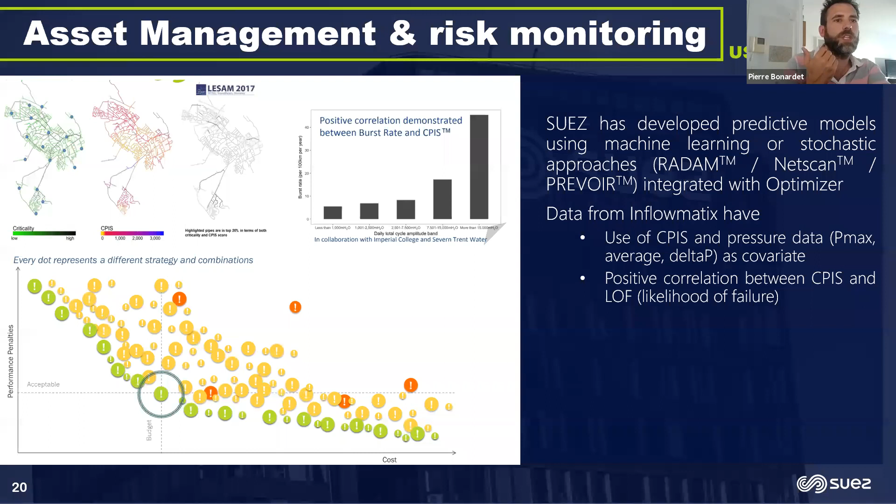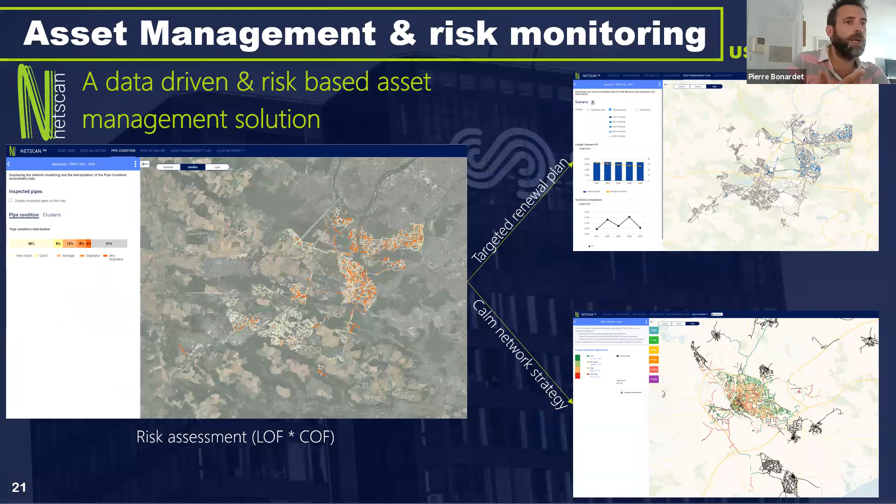So we have developed tools like NetScan. It's a tool that does risk assessment on the network, combining likelihood of failure and consequence of failure. And the two outcomes are a targeted renewal plan and a calm network strategy. And the last topic on which we're working is about managing a lot of data. I explained earlier that it's not only about pressure management, but it's about network management. And it's very important to have tools to gather data coming from different sources.

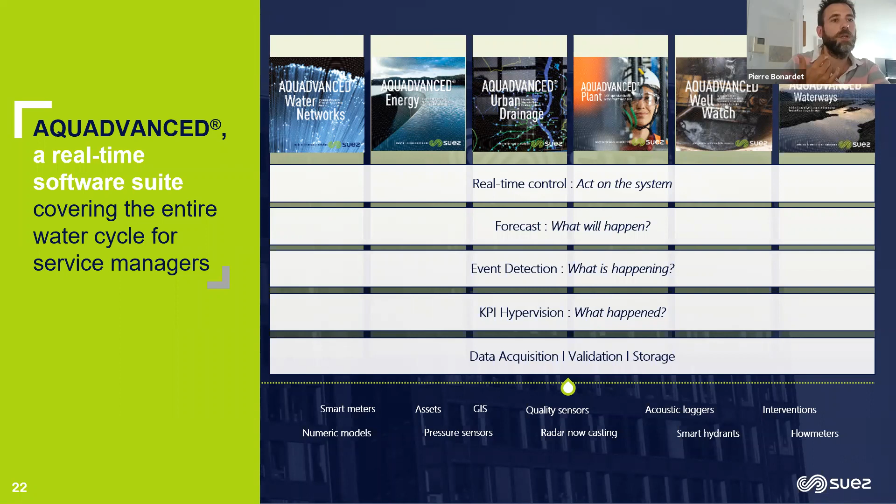And in Suez, we have developed the AQUADVANCED suite that enables monitoring and control on the network, taking data from the GIS and also from all sensors that we can have on the network and crossing data together. So the idea for us is clearly to integrate Inflowmatix in this software, in this tool, and to propose a calm network approach embedded into AQUADVANCED, and to propose pressure monitoring and network management through AQUADVANCED.